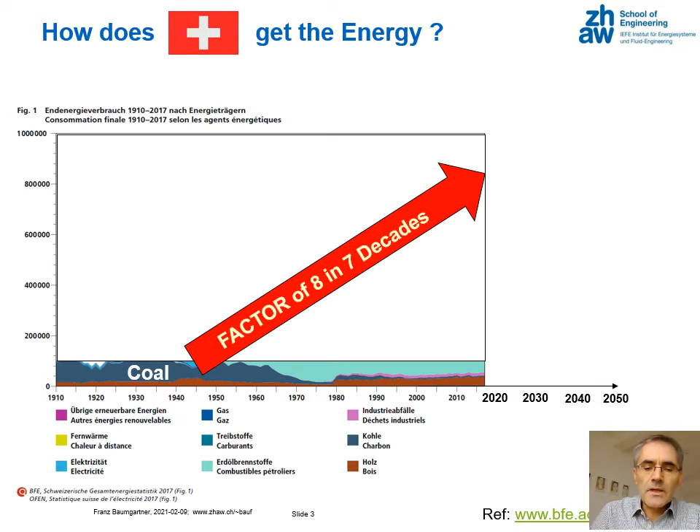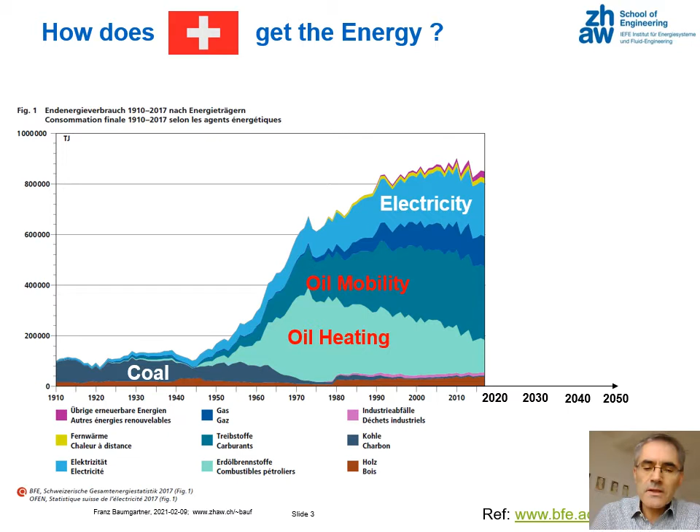Switzerland is one reason for this CO2 emission increase. For example, the energy demand increased by a factor of 8 in the last 7 decades. Electricity is one part of today's used energy, but the base is still oil for the mobility sector and the heating sector in our buildings. And it will be finished in 2050, because then we have no resources anymore for oil.

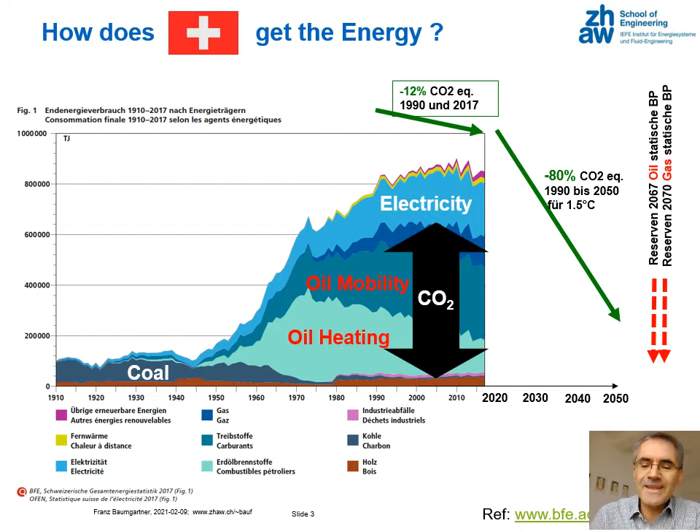We have to take care that all this consumption and waste of energy caused a lot of CO2 emission. That was reduced a little bit, by 12%, in the last 3 decades, but it has to be decreased by 80%. It's not done automatically, we have to work a lot for that, particularly in the next 2 decades. From 2020, 2030 to 2040, we will see a tremendous reduction in the fossil oil business in Switzerland.

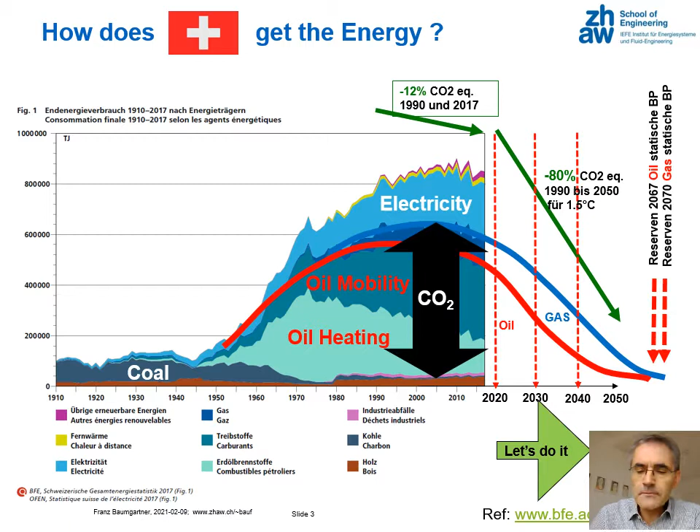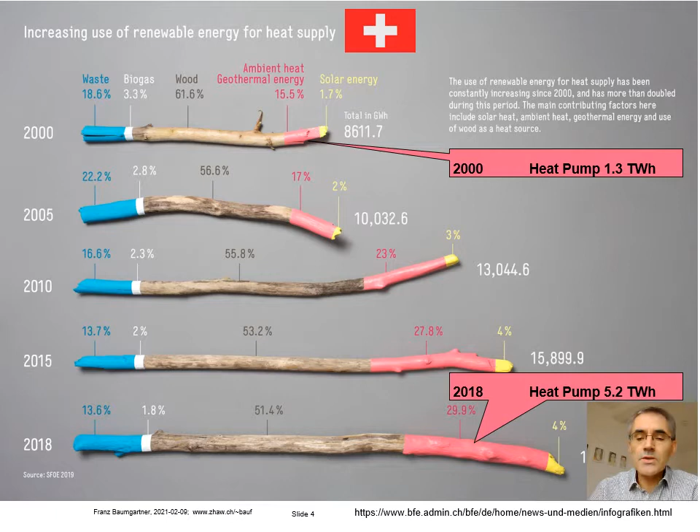But we have to start, and let's do it. Since 2000, the usage of wood for the production of heat from renewables was increased, as you see here. And the pink color shows us the increase of the usage of heat pumps, starting from 1.3 terawatt hours in 2000 to nowadays more than 5 terawatt hours. So a factor of 4. That was a success in Switzerland.

Not all the things are bad, but we still have to improve that process and be a little bit faster than that.

One solution is the exchange of fossil heating in the buildings by photovoltaics together with the heat pump. With that technology, we are able to meet our half cut of the CO2 emission from the building sector since 1990 in the coming years.

But we need people, acting people in the government at each level, like my former student Neukom, who is now pushing to exchange 100,000 oil-powered heating systems in the canton of Zurich. That is hard work to do, because in the last 30 years this was not successfully done. Mainly in multifamily houses, most, 80% of all the heating systems, were exchanged by another fossil heating system. So we have to go out to the people.

We have the technology, but a very important point is to change the mind of the end customers. Other solutions are these solar cells, as I show you here. And in Switzerland today, 4% of the electricity is produced from solar, and per person we have installed one PV module with 1.6 square meter size.

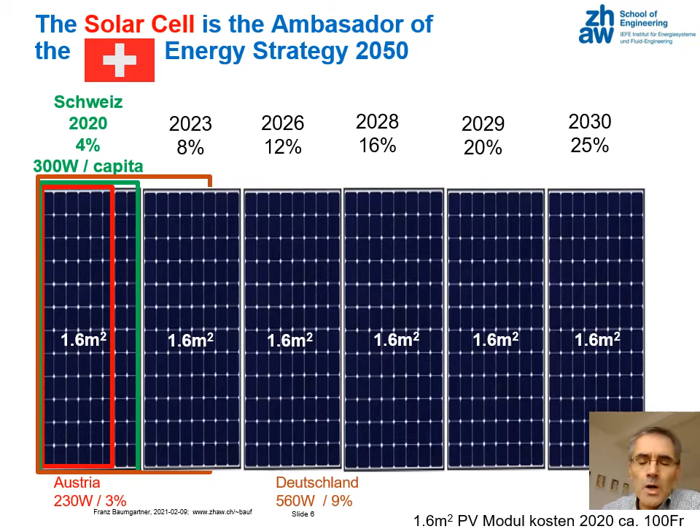In the coming years, we have to increase that amount of photovoltaic solar power in Switzerland to sum up maybe a quarter of all the electricity production at the end of this decade, in 2030. And it's not enough to buy all these PV modules. We have to find new ways to mount them, we have to develop new systems. There is a lot of innovative work to be done by the next generation.

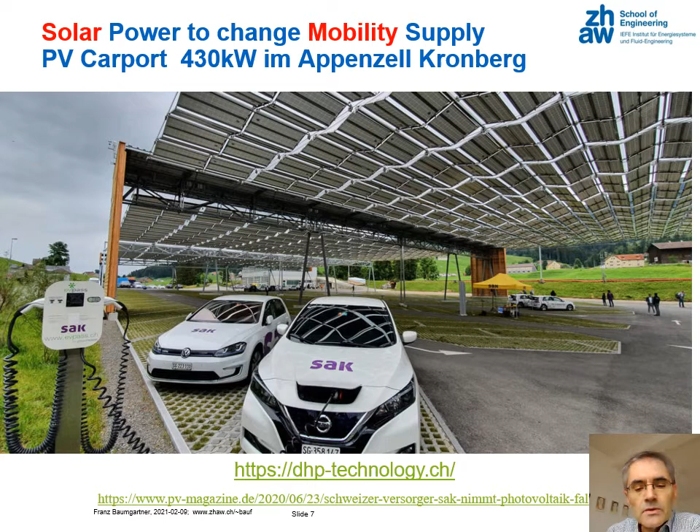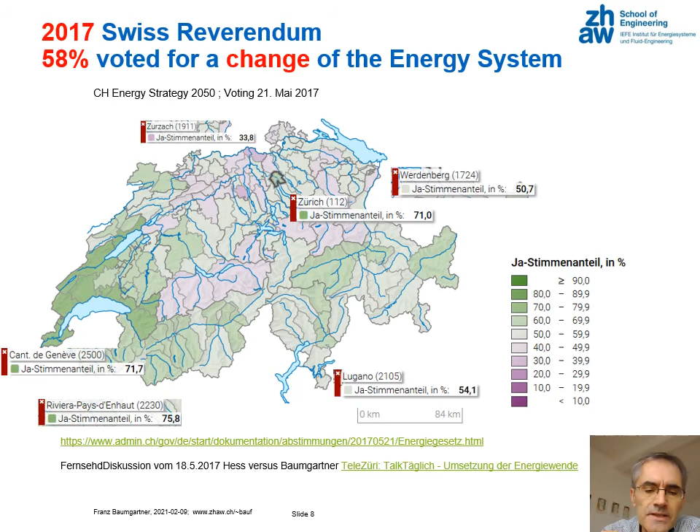What is very promising in Switzerland are the votes 3 years ago from the people, and 58% say yes, we want to change our energy system. It's different across all the different cantons, as we expected, but it's not enough.

Today, only 1% of worldwide PV modules are operated and installed in Switzerland. We are a rich country, that has to be much, much more than that.

One of my students, Patrick Böhni, has developed a new way, a new method, a new algorithm, a new control system to control the heat pumps to improve the self-consumption of solar electricity in his own house. And this is one progress of technology we have to go forward over the coming years.

And it is not enough to earn awards for these ideas and these concepts. We have to reduce CO2 as a result of all this work.

In our university in Winterthur, and other universities as well, we want to improve these skills about renewables and the change of the energy system together with our students. And yes, we can do it, and you have the power to do it.